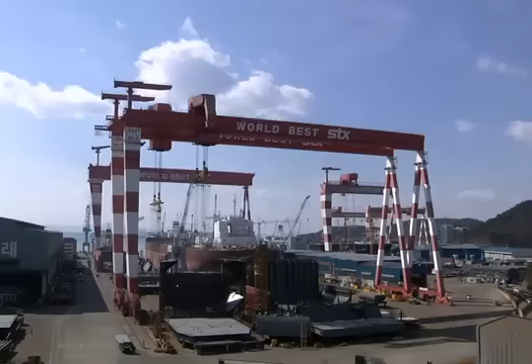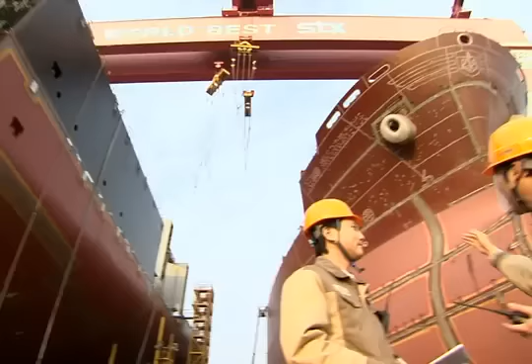With world best technology and service, STX Offshore and Shipbuilding is opening the future of the shipbuilding and offshore plant industries. Based on eco-friendly technology, STX Offshore and Shipbuilding is becoming a world-leading expert in high value-added vessels. STX Offshore and Shipbuilding utilizes the most advanced shipbuilding methods to maximize efficiency of its global production plants. From commercial ships and special-purpose ships to offshore plants, it has proven its competitiveness in every field of shipbuilding and offshore plants. Based on customer-oriented management, timely management, and technology management, it is building its reputation as a global top offshore and shipbuilding company.

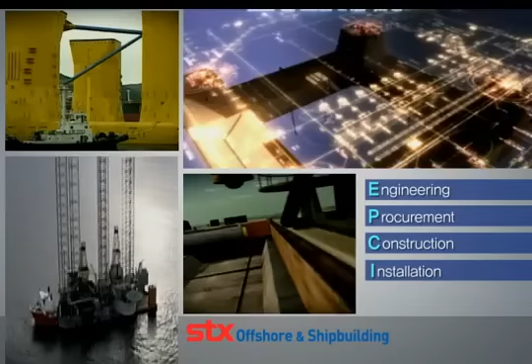Based on its EPCI capability of providing a turnkey solution that integrates engineering, procurement, construction, and installation, it is constructing FPSOs, which are floating production, storage and offloading facilities, as well as deep-sea drilling facilities. By building high value-added offshore plants, it is strengthening its leadership in the global offshore plant market.

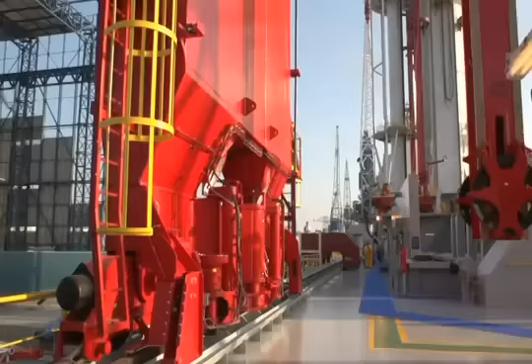Revolutionizing the future of the global shipbuilding and offshore plant industries with its innovative technologies, STX Offshore and Shipbuilding.

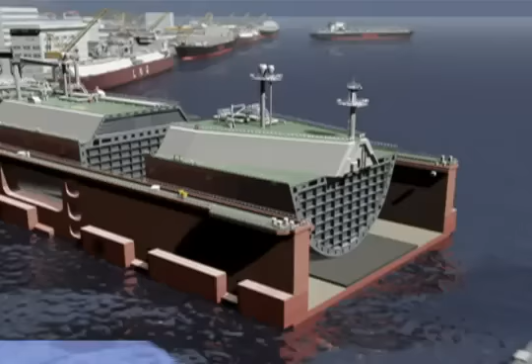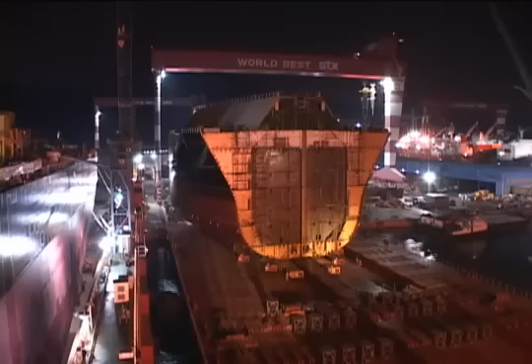By utilizing the semi-tandem building method for constructing multiple ships simultaneously on a single dock, the world's first skid launching system for building ships on land, and the new ROSE building method that uses semi-submersible heavy cargo carriers and module transporters, STX Offshore and Shipbuilding was successful in mounting a 7,000-ton ultra-large block in water.

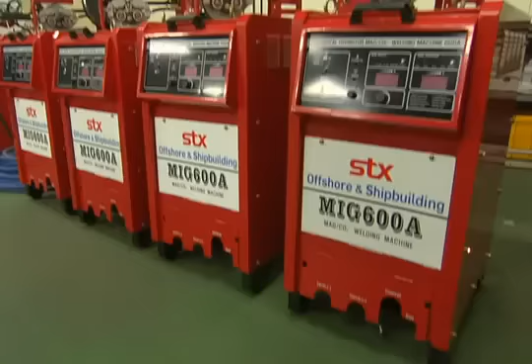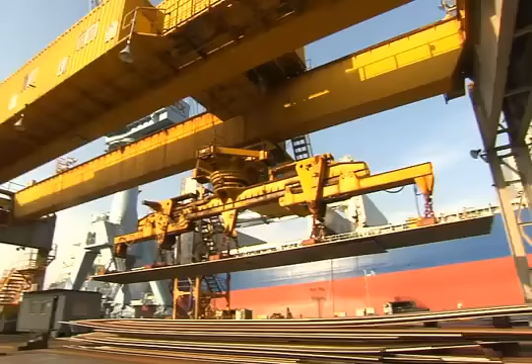By developing the world's first optical fiber digital welding system and a steel management system for real-time tracking of steel, STX Offshore and Shipbuilding is maximizing its productivity.

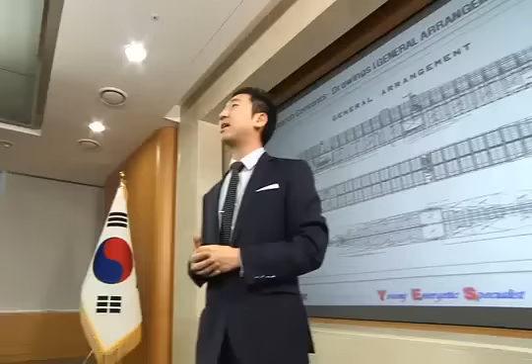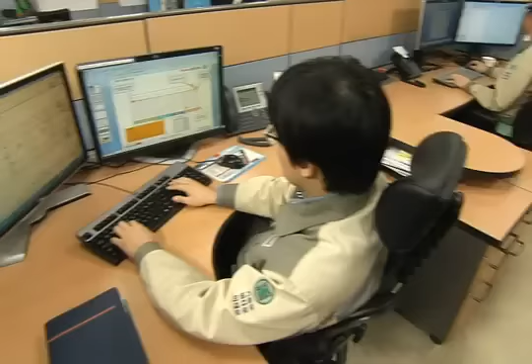The STX Institute of Technology is developing STX Offshore and Shipbuilding's core technology and leading the R&D strategies as a control tower of STX Group's R&D. The R&D Center shares information and engineers ships that correspond to the primary portfolio of global production plants and strives to maximize the synergy of technical collaboration.

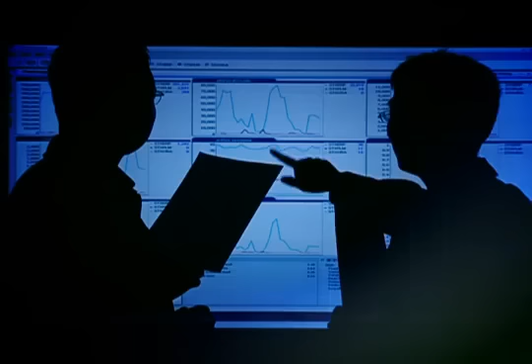Based on these state-of-the-art technologies, STX Offshore and Shipbuilding is writing a new page of history towards success.

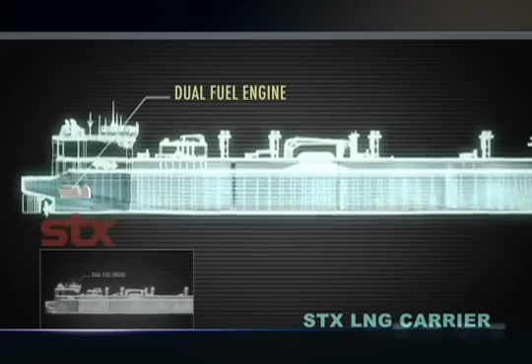The Jinhae Shipyard is the heart of high value-added masterpiece shipbuilding. The NO96 type LNG carrier uses dual-fuel generator engines for electric propulsion, improving spatial efficiency in the engine room and maximizing cargo capacity. Furthermore, STX Offshore and Shipbuilding has developed independent cargo bays, resulting in outstanding competitiveness in LNG carriers and offshore plants, such as LNG FPSOs. By deploying a design that maximizes cargo capacity among LNG carriers with 4 cargo tanks, it is providing the highest level of safety and efficiency.

STX Offshore and Shipbuilding is also a pioneer of building eco-friendly ships. The 13,000 TEU container carrier, which maximizes energy efficiency, was the first very large container carrier to acquire EEDI certification from Germanischer Lloyd. By being commissioned to build a 16,000 TEU container carrier and successfully developing a 22,000 TEU container carrier model, which had been considered the limit in terms of technology and economic efficiency, it is leading the very large container carrier market.

The Very Large Ore Carrier, which was designed and engineered by STX, boasts the world's largest size at 400,000-ton class with lighter weight, higher fuel efficiency, and 20% higher cargo capacity than other ships in its class.

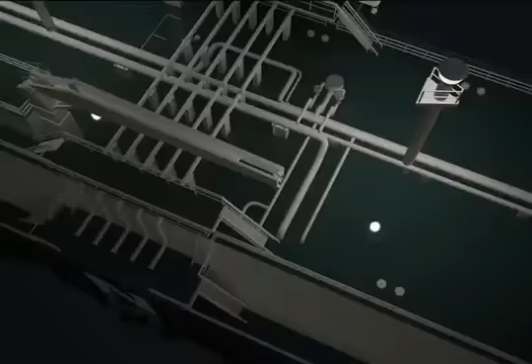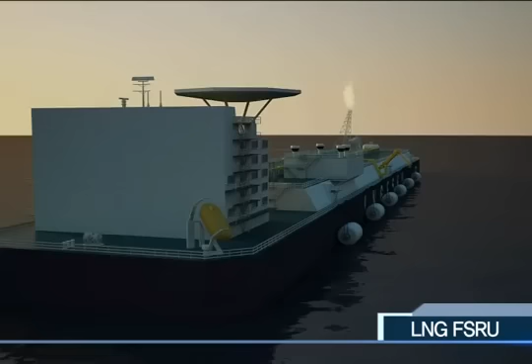Performing production, liquefaction, storage, unloading, transportation, and gasification of LNG in the ocean, STX's LNG floaters, including LNG FPSOs, LNG RV, and LNG FSRU, are built with original designs, and STX Offshore and Shipbuilding is leading the market with world-leading technologies.

STX has also successfully built 4 PKG destroyers with stealth functions, and it is expanding its business to Coast Guard patrol ships, research vessels, and other high value-added special purpose vessels. In the Busan shipyard, STX is building ethylene carriers, LNG carriers, and 10,000-ton class oil carriers, and it is securing greater growth engines by specializing in these types of vessels.

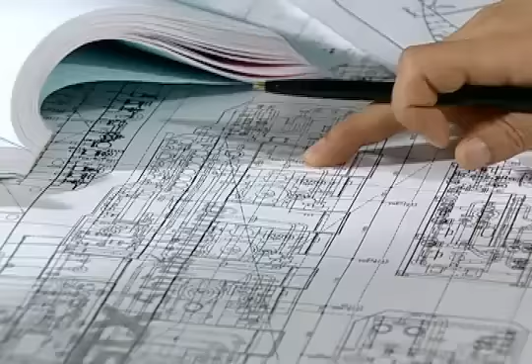The Hyukshin Company in the Goseong Shipbuilding Industrial District, which manufactures large blocks, will be developed into a plant that specializes in offshore plants.

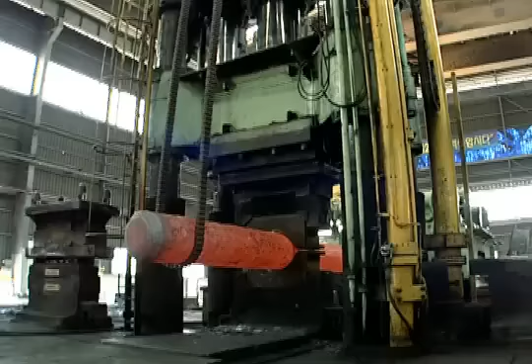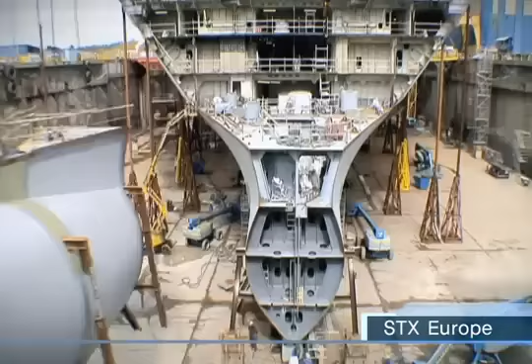Based on its long history and advanced technologies, STX Europe is leading the specialized ship fields such as cruise ships, ferries, and offshore plants. And it has demonstrated its advanced technologies by building Oasis of the Seas, which is the world's largest cruise vessel, and the Allure of the Seas.

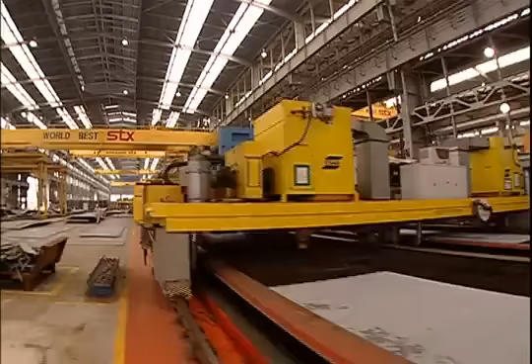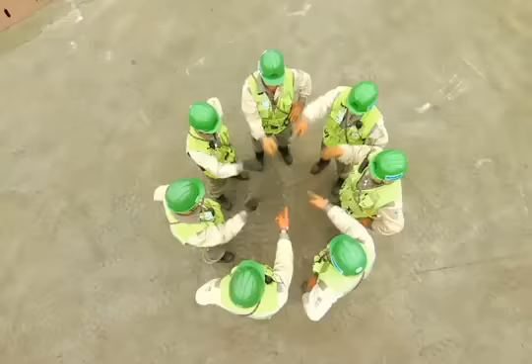People stand in the center of STX Offshore and Shipbuilding's dream to become the world's best. The people of STX Offshore and Shipbuilding are the greatest asset for achieving its goals. By prioritizing their health, safety, and working environment, STX Offshore and Shipbuilding has established an excellent HSE system, and it's considering health, safety, and environment first at all times.

Under the belief that sharing is key to greater possibilities, STX Offshore and Shipbuilding is actively carrying out volunteer programs, thus growing with the local community.

After 10 years of global expansion, we will lead the world for the next 10 years. STX is preparing to rise towards a greater tomorrow. By achieving the vision of leading the ocean and beyond by 2020, STX will become the leader of every field related to the sea.

At STX, challenge is in our DNA. To the world, to the future, with infinite creativity and endless challenges, STX Offshore and Shipbuilding will discover the greater values of the sea. World best, STX Offshore and Shipbuilding.